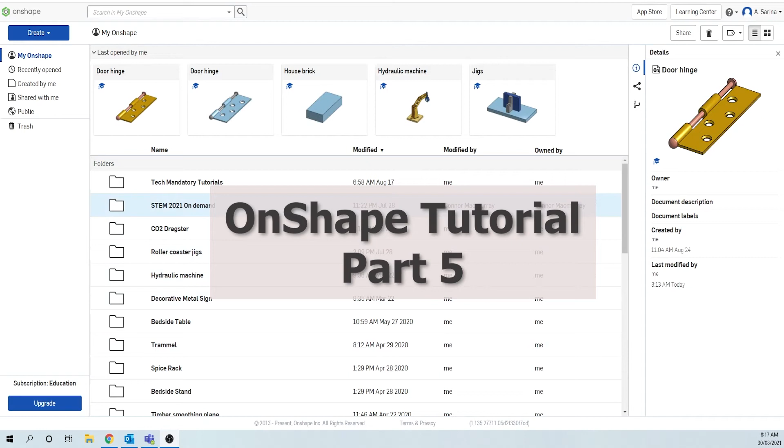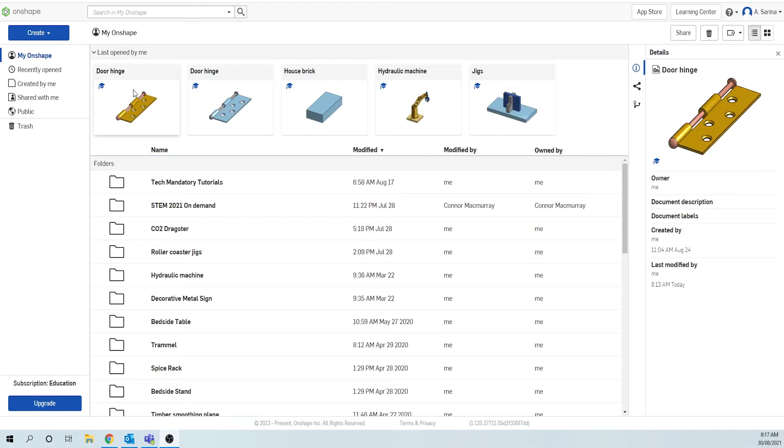The first thing you'll need to do is log into OnShape and look for the door hinge that you created last time, and double click on that to open our part studio.

You should have in your part studio the leaf part of the hinge that we created last time. We called it Hinge Leaf, and then the pin, which we called Hinge Pin.

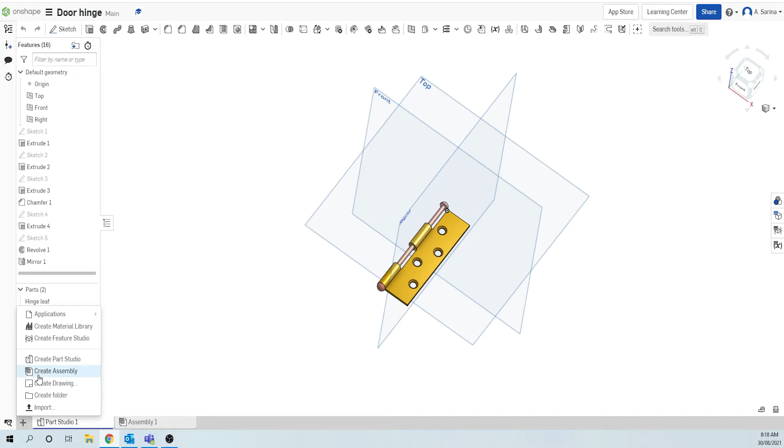Now that we've created our parts, we want to go into an assembly window, which there should already be one created down the bottom here. In mine it's called Assembly 1, but if there isn't, you just need to click the plus in the bottom left corner and select Create Assembly. I'm just going to go into the one that's already created.

Once you're in the assembly window, you'll notice the tools at the top change and look a bit different, and we'll go through some of those shortly. Basically, the assembly window allows us to bring in all the parts we've created for a project. This becomes especially important when you create a project with multiple components and parts. A door hinge was just one of the simplest projects I could think of to demonstrate how to use the assembly tool.

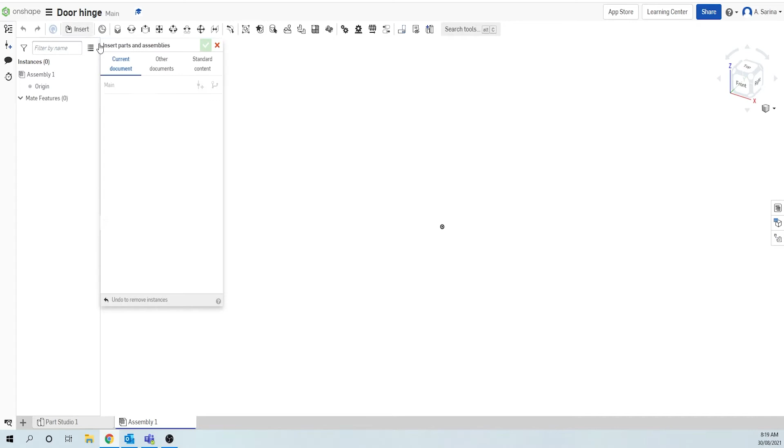What we're going to do is go to the Insert tool at the top, click that, and you'll get a list of all the parts you have in the part studio. We're just going to start by left clicking Part Studio 1, and you'll see it inserts the hinge leaf and the hinge pin. You can click the tick at the top to let it know we're done for now.

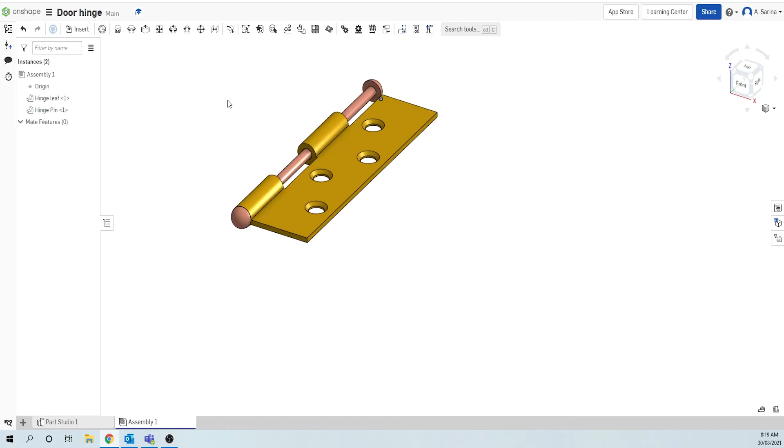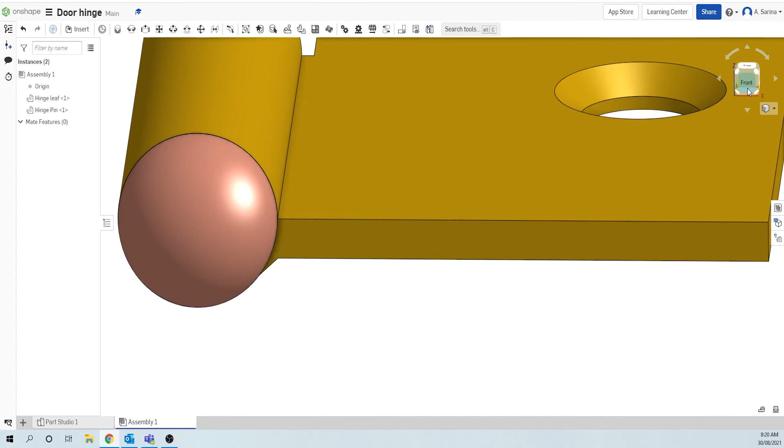The assembly window works in a similar way to the part studio, where you can zoom in and out with your mouse wheel by scrolling. You can rotate in 3D space by holding right click and dragging. You can pan by clicking the mouse wheel and moving, or if you don't have a mouse, right click the cube in the top right corner and move that around, or click a face to view it.

The first thing we need to do when we create an assembly is identify which part of our assembly is going to be fixed in space. In this case, that's going to be this leaf part of our hinge.

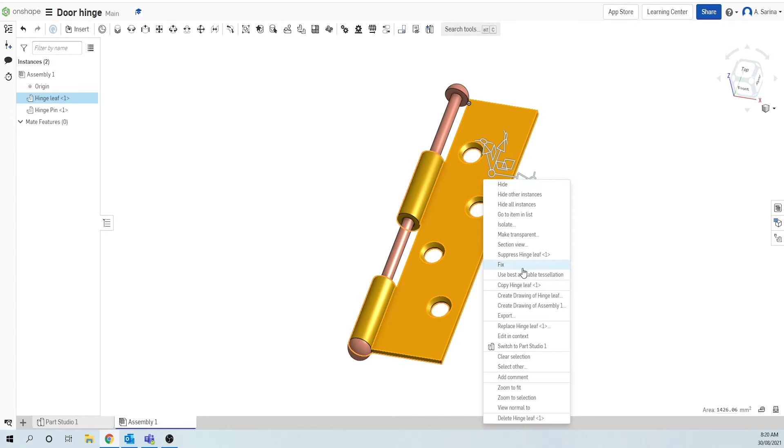To fix it, what we need to do is left click and select it, right click and then select Fix. What that does is now in our feature tree over here, you can see the little fixed symbol next to it, meaning I can't move this hinge leaf in space.

In the assembly window with parts, if you left click and drag them, you can move them around. You can't do that in a part studio. However, if you fix something like this hinge leaf, you'll see if I try and move it, I get a little red symbol meaning I can't move that part because it's fixed.

It's important that you fix one of these parts so that when you start to create mates or joins in your assembly, this part will become your main reference.

Now let's start by joining this hinge pin into our hinge. The way we do that is by using something called a mate. A mate in OnShape basically lets us pick a point on one part and align it to a point on another part with various constraints.

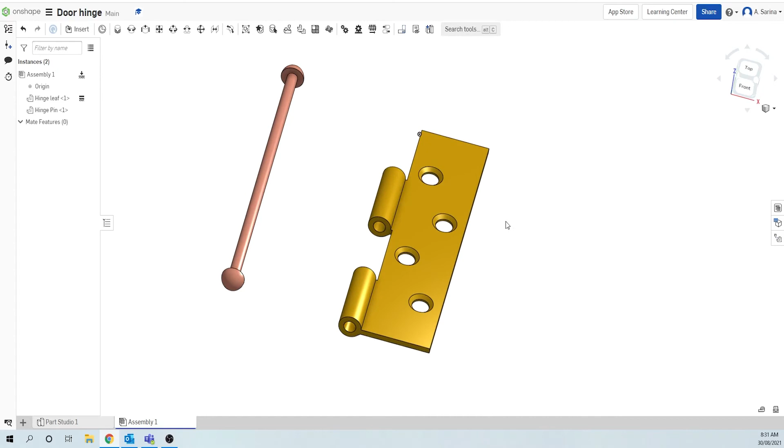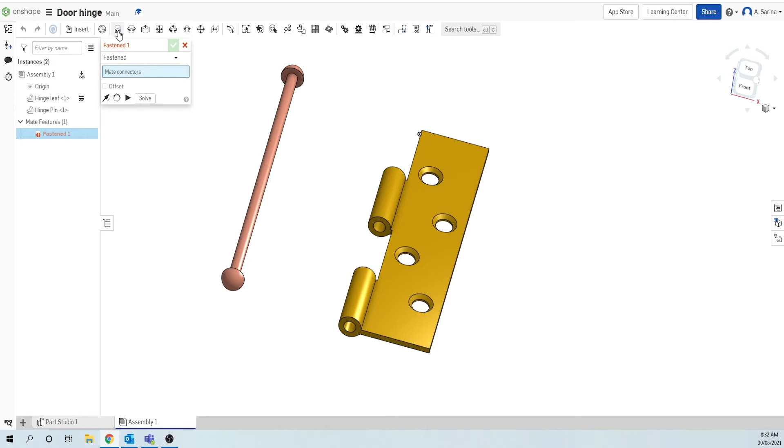To assemble our hinge, we need to use these mate connector tools at the top of the assembly window to choose two points, one on this hinge pin and one on the hinge that will be joined together. The first type of mate we're going to choose is a fastened mate. I select the Fastened Mate tool in my ribbon at the top, and it's asking me to select two mate connectors. The first mate connector I'm going to choose is this one at the end of our hinge.

So you'll see when I mouse over the hinge, I get the option of all these little mate connectors all over the surface, and they're points that I can use to align to another part if I needed to.

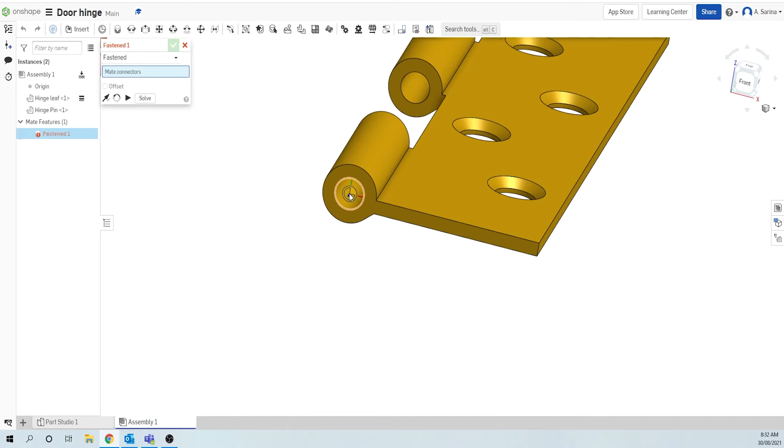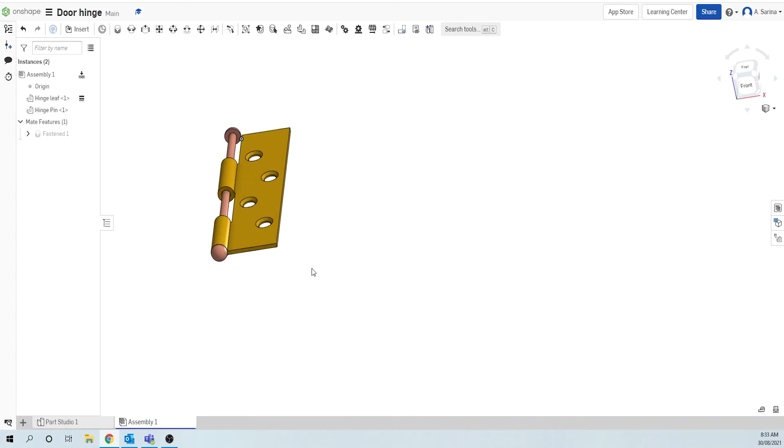We're trying to align the hinge pin to this barrel part of the hinge. So I need to select the mate connector at the very end, in the center of this circle on the end of our hinge. That mate connector is going to be joined to the same mate connector at the center of our hinge pin. So I click that one, click the tick, and close our mate connector window at the top, and you can see that now our hinge leaf is connected to our hinge pin.

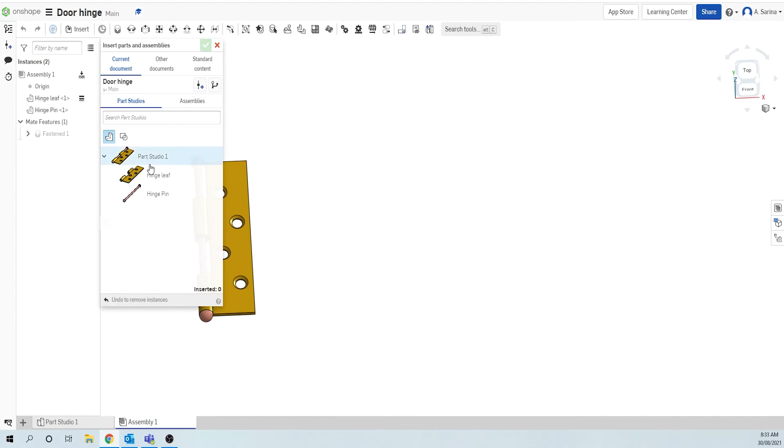Okay, now we need to insert another hinge leaf and rotate it 180 degrees so that we can attach it to the other side of this hinge. To do that, we click Insert at the top of our assembly window, click Hinge Leaf, left click and drag your mouse out into the window. Left click again to place your hinge leaf, and then click the tick to let Onshape know that you're finished.

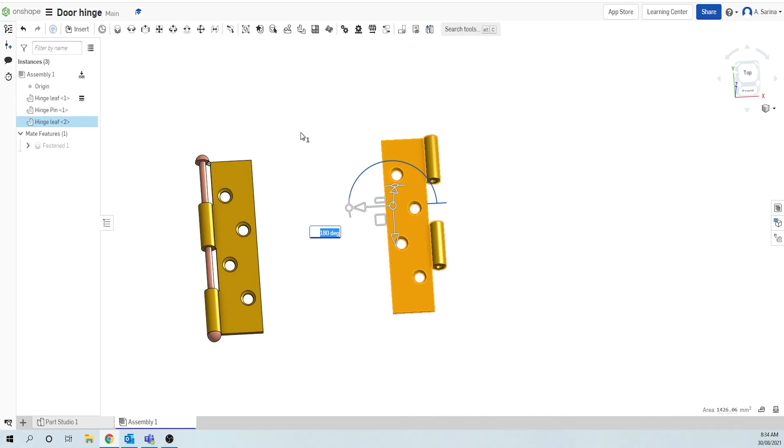Now what we want to do is rotate this hinge 180 degrees. We left click on it, and you'll see we get 3 arrows that allow us to move our hinge in space. This arrow here has a little rotate symbol at the end that lets us rotate in the direction that we want. So we simply click and drag this rotate symbol, and you can drag it all the way around to 180 degrees, or just type 180 and press enter. Once you've done that, press escape on your keyboard and then the space bar to deselect everything.

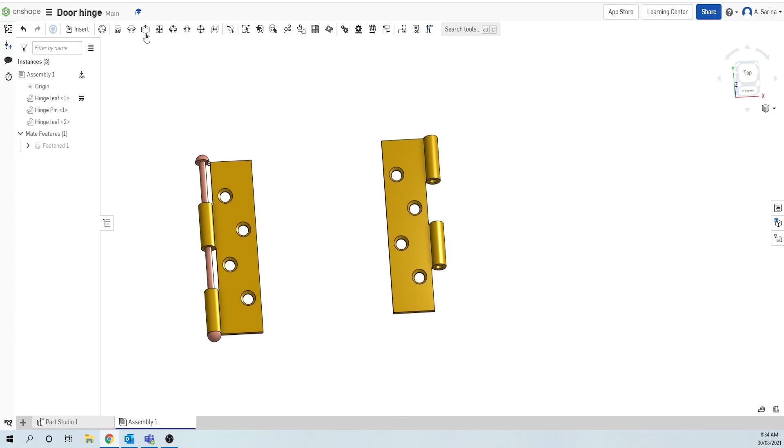Now we need to use another mate to attach this hinge to the other side of our hinge assembly here, and this time we want our hinge to be able to move. So we're going to use a different mate, called a Revolute Mate. A Revolute Mate allows us to fix this hinge to our hinge pin, but still enable it the freedom to revolve around the hinge pin. So to do this, we're going to select Revolute Mate.

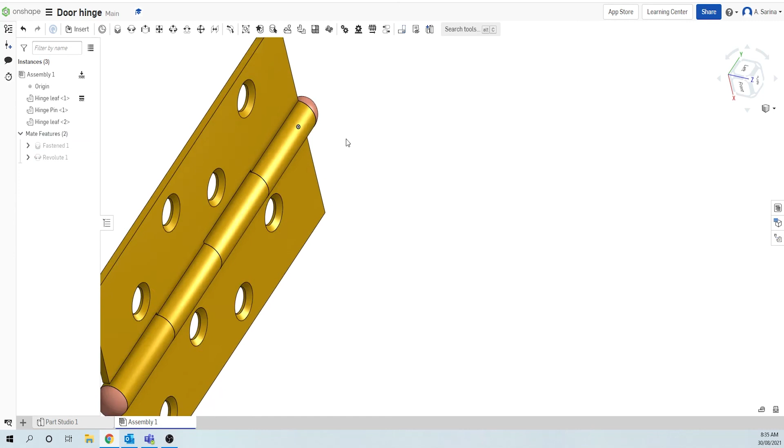I'm going to select the end of our hinge again in the center of our circle, and then select the opposite end of our hinge pin in the center again. Click the tick and close our dialog box. Now you can see that our hinge is fully assembled.

The next thing that we're going to do is set some restrictions on our Revolute Mate and then animate our hinge to see how it would work in real life.

Okay, to set the limits on our Revolute Mate, we need to double click on the mate in the feature tree and tick the box which says limits. Now I've already worked out for my hinge that for the minimum limits I need to set it at minus 180 degrees, and for the maximum I need to set it to 120 degrees. So type into this top box minus 180 and then 120, and click the tick to let it know that you're finished.

Once you've done that, if you right click on your Revolute Mate in the feature tree, select Animate. Here in the steps, you can reduce or increase the amount of steps depending on how fast or slow you want the animation to go. Less steps means a faster animation, and more steps means a slower animation. So in this case, I might change it to 250 steps and then click play.

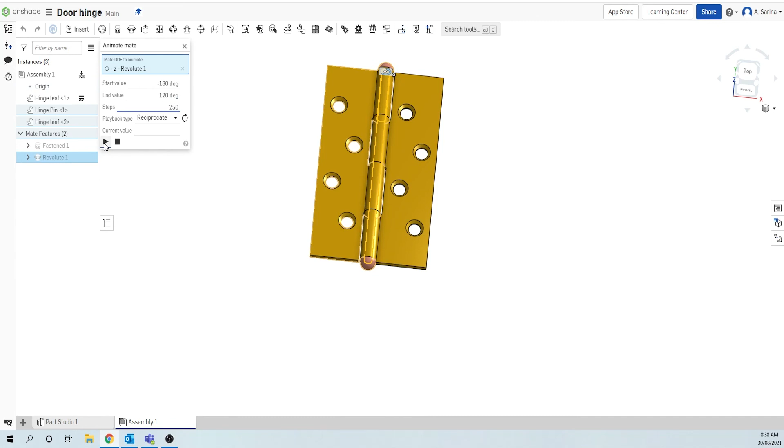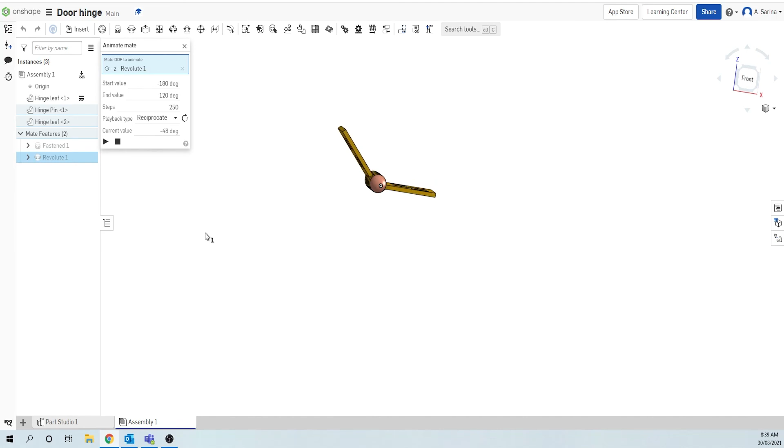Then I can rotate around and watch my hinge as it functions, to observe how it would function in real life. If your hinge isn't functioning correctly and this leaf here is rotating through the fixed leaf, what you'll have to do is go back into your Revolute Mate by double clicking on it, and change the limits so that the top one is minus 120 and the bottom one is 180, and click the tick, and that should fix it.